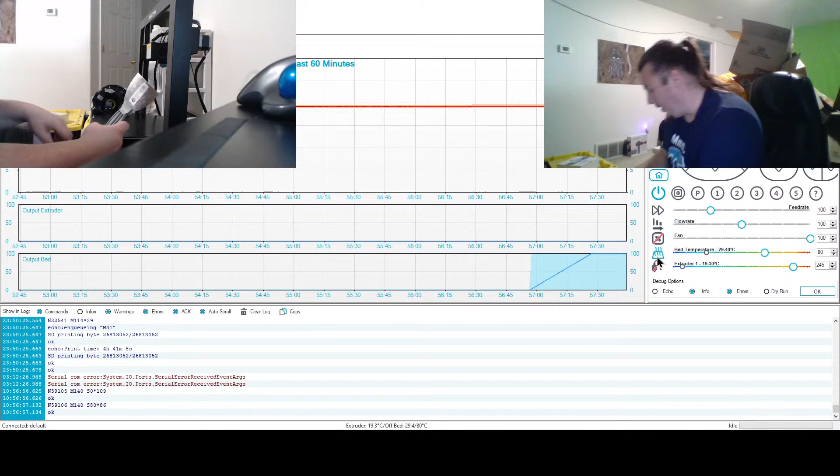Anyway, the drink dispenser is going to take a little bit of doing, but I'll tell you what I'm going to do. I'm going to kind of heat this corner up, overheat it a bit. Heat it up and it should come off a little bit easier, right? One would hope.

Because the brim is not coming off the bed easily. Using an ABS slurry to adhere it to the bed works great, by extremely adhering it to the bed.

Let's see if that's warm enough. Yeah, because I'll show you guys that ring there, that's actually a ring of material, ABS to be precise. Which I don't remember what ABS stands for.

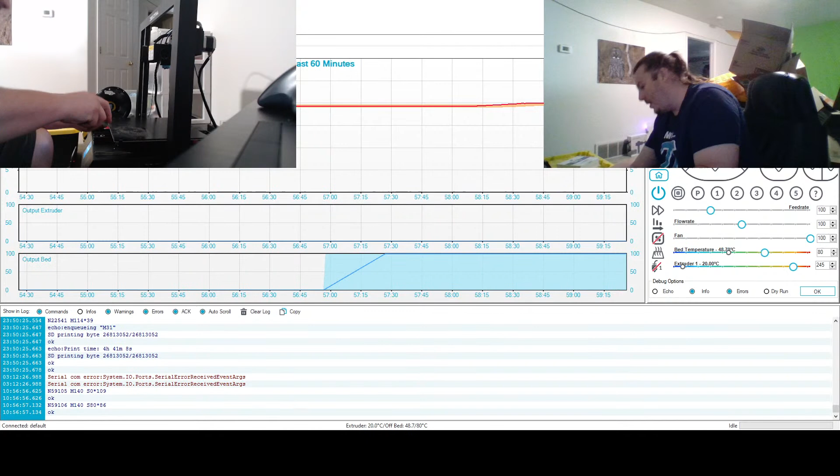What is it, acetyl-butyl styrene? Something like that? Yeah. And we kind of need him off of there so we can do other jobs.

So what I want to do is, guess while that's heating up, so I have a problem, see? I need to put stuff on an SD card.

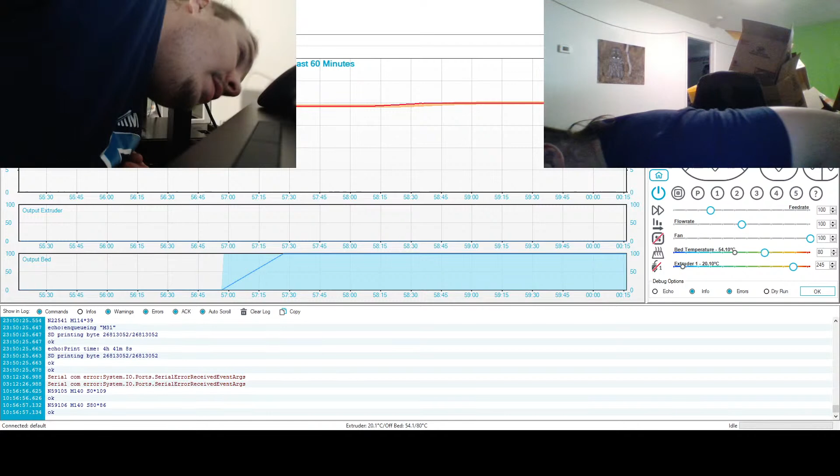Actually, not really a problem. Okay, I'll just move the mouse dingly dungly. So, boop.

Also, did anybody get the description? Come with me, and you will be in a world of pure and utter boredom. Come on, it's a thing, it's a thing that people sing. Somebody did. That we do. It's funny.

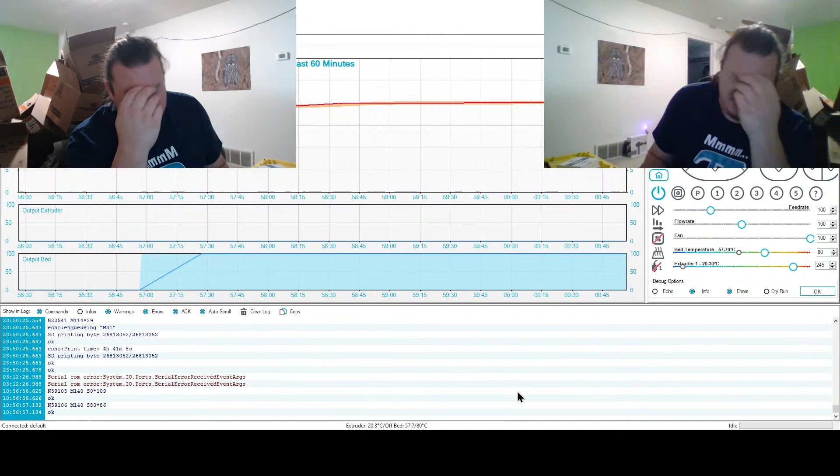I need to set up the frickin' soundboard on this laptop in OBS. That's what I needed to do today, honestly.

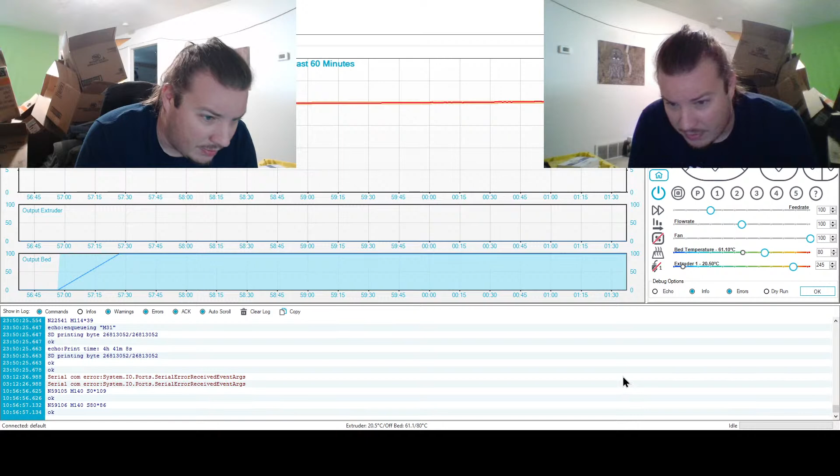I was like, what am I doing? Okay, we'll go back. I've already got the ABS loaded. Can I just print the stuff in ABS? I think I'm just gonna print it in ABS. Screw it, we've already got the ABS loaded. I don't have that much PLA left and it's kind of old, so I don't know if it'll work good or not. But we can.

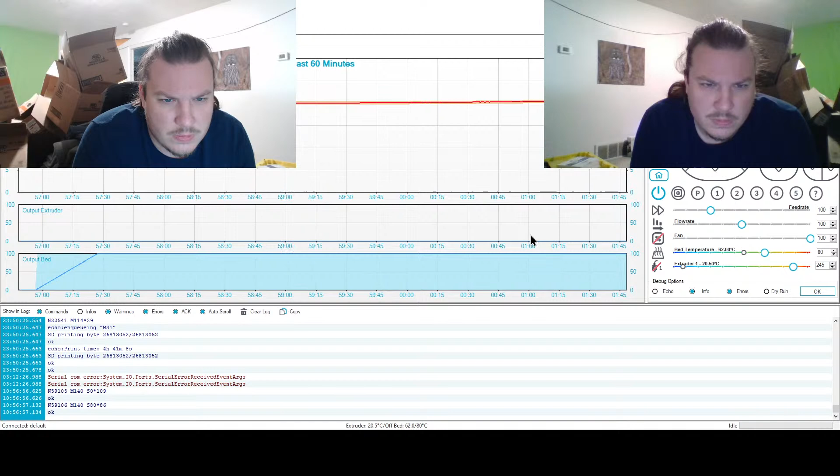Print cam mic stand. Copy. Paste cam mic stand. Bring both of those into Prusa.

Oh, it's outside the build area. Your mom's outside the build area. Okay, so... What? What? Why are you doing that? Shut up. Okay.

Lots of weird stuff. So apparently it wanted to bring it in as a single piece, so we need to do this. I want to print him exactly just like that, and then I'm going to paint supports, because I noticed Prusa likes painted supports a lot better for some reason.

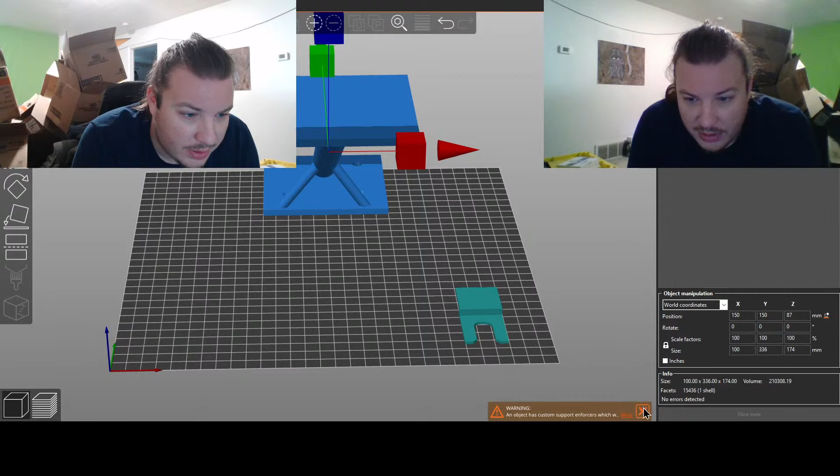Brush that. Kind of like that. Yeah. And then... Oh, that's the thing I need for the soundboard. And then... Okay, now I need this guy here. Yeah, who cares, guy? Shut up.

See, so I wonder, if you have a part overhanging another part that is part of a different part, does it matter?

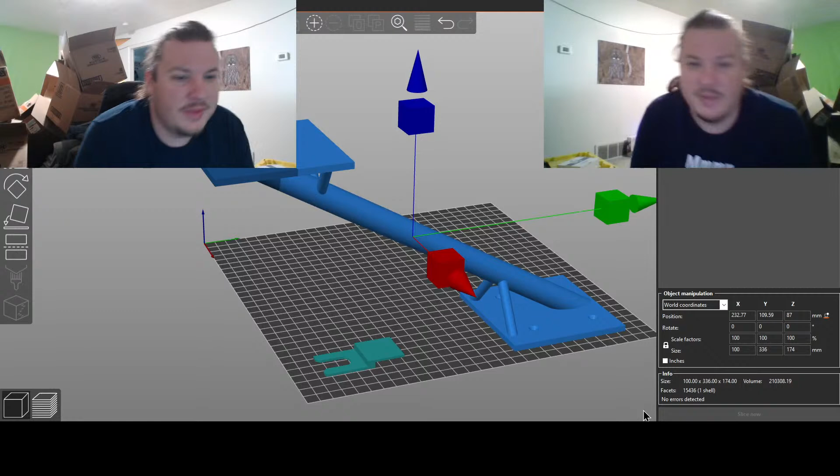Cut. Yeah, cut it exactly right there.

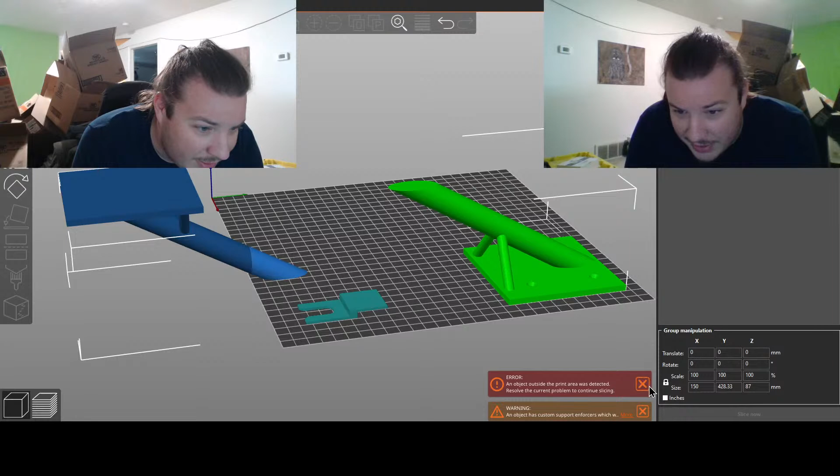What? What? What do you mean? Go away! Jesus. I want you to... Okay, fine.

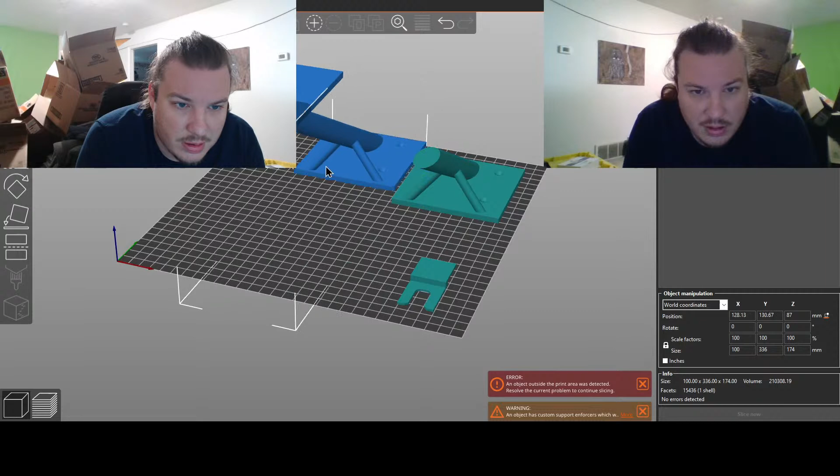Cut. We just want 2 of those anyway. No, we don't, because we don't want the screw holes. That means I have to put another one in here. Okay, we're going to cut this one, and we're going to keep only the upper part, and then we're going to rotate.

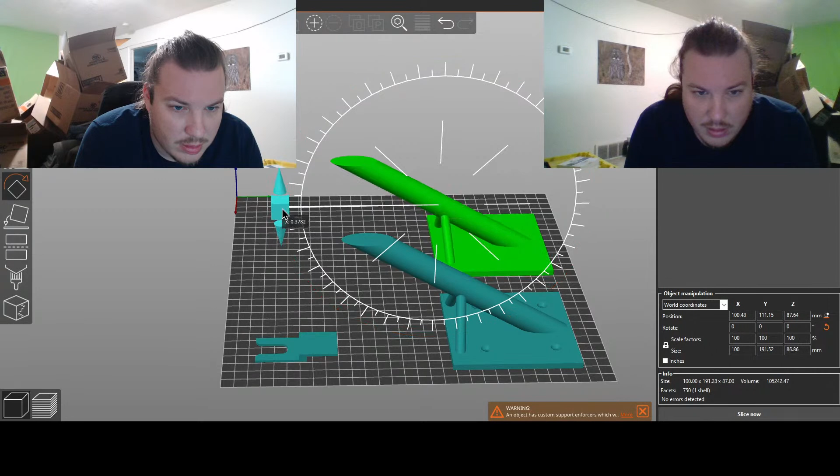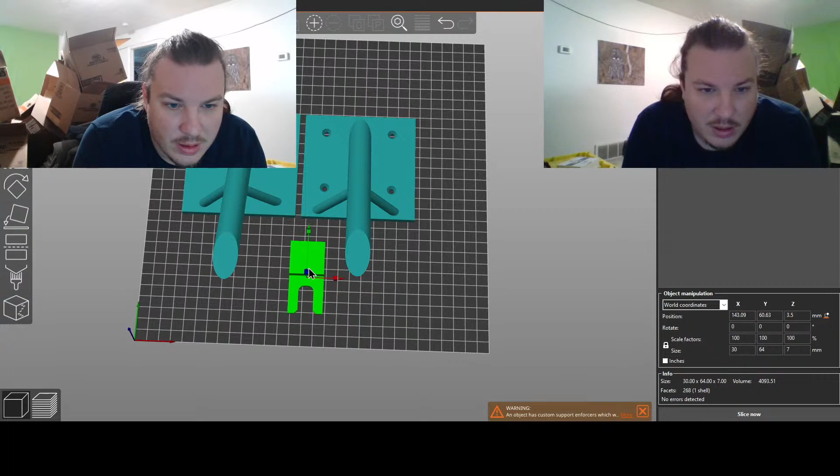Oh yeah, where's the place flat? Place flat, place flat, place flat. Okay. Now look at that, look at that. Yeah, look at that, look at that. Kind of like that. What happens if we do that?

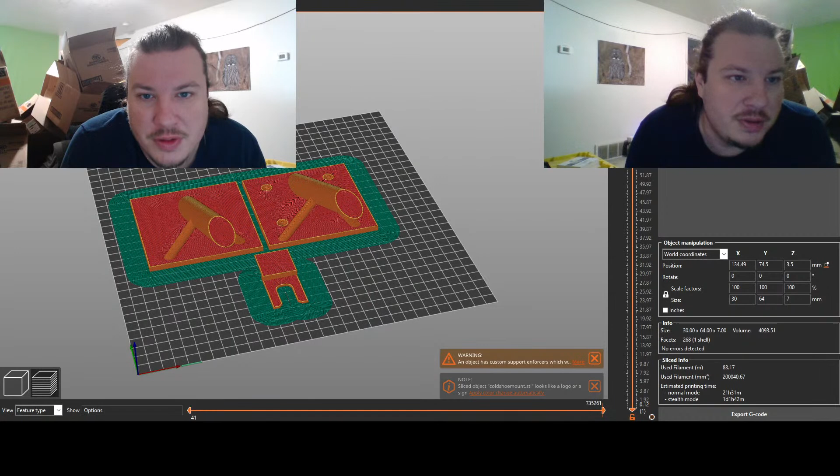Slice now. I want to try to do these angled bits without supports. What do I want to try to do? Oh, I also need to change infill to 40%. Also, give me just a moment, I will be right back.

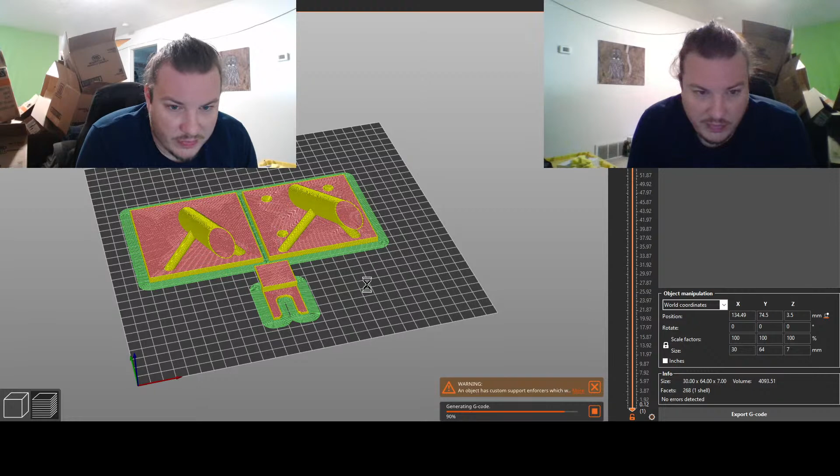Okay, so we're doing this. That's a neat pattern, concentric around multiple points. I guess it's not concentric, is it? Did I do concentric on the top? I did concentric, yeah, I did concentric on the top for this.

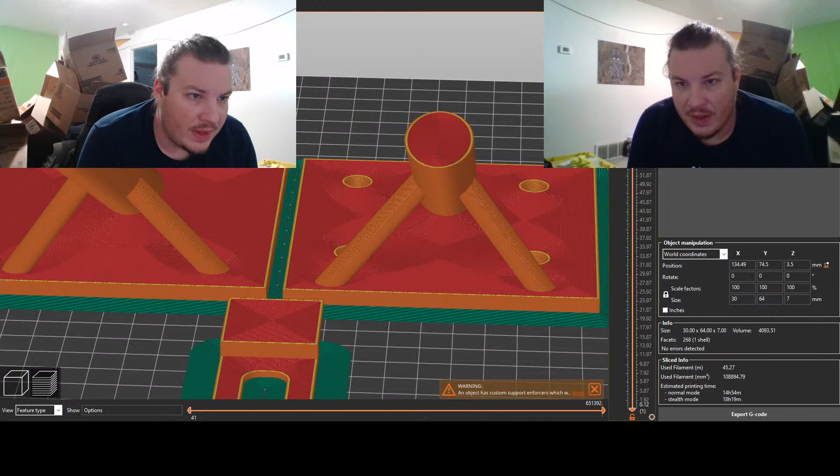So what we're gonna do, I don't know what the overhang of each of these layers is, and I don't guess we need that much infill. We could probably go with a little less. Go 25. Yeah, that much infill, that's how much we need. That's probably better, it's not like it's holding a whole lot of weight.

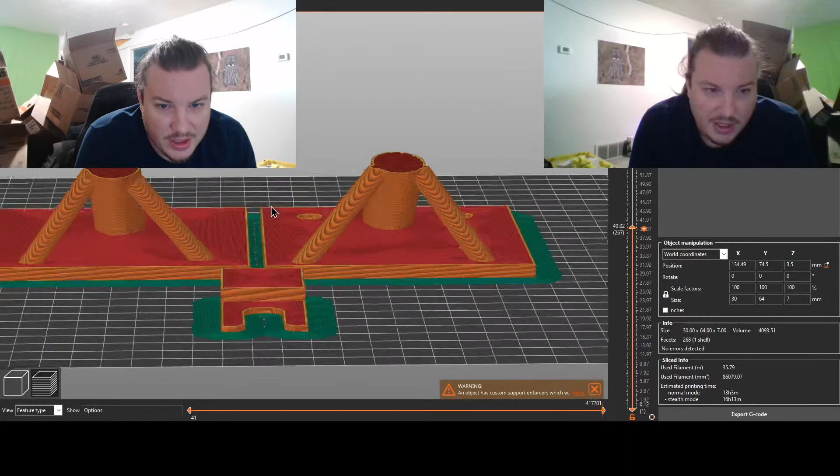Just gonna be the camera and the mic. And then, yeah, when these are done in 16 hours, you print this, I glue this surface to that surface, and that surface to that surface.

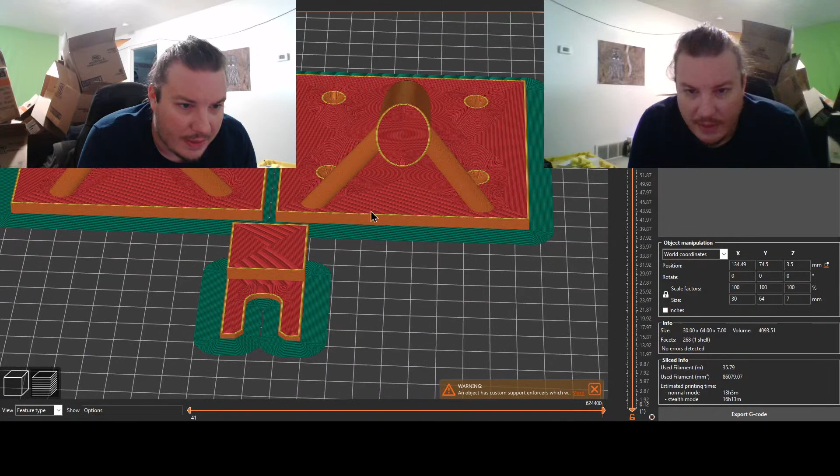I mean, the only way to find out is to give it a little old testaroo there and there. Gotta wait for the bed to cool off. It's still 56, so I gotta wait for the bed to cool off for another few minutes.

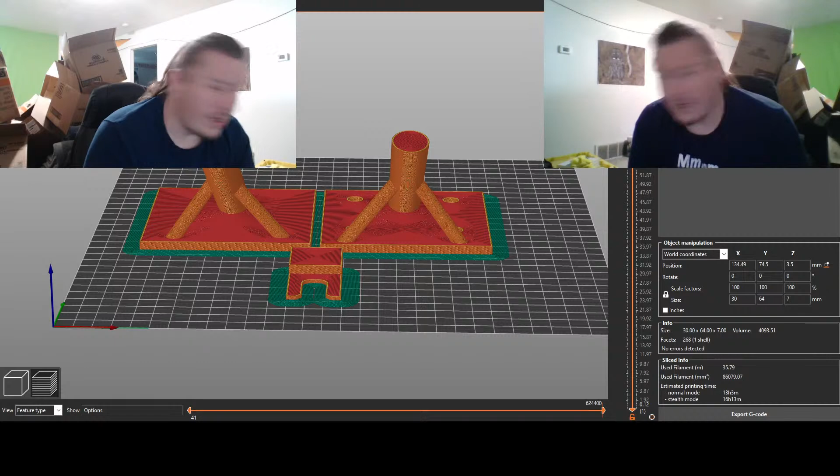And then I can take the acetone and do the thing to the thing. The thing, the thing. 57.

Guess I can start preparating. I might get the brush down to the bed.

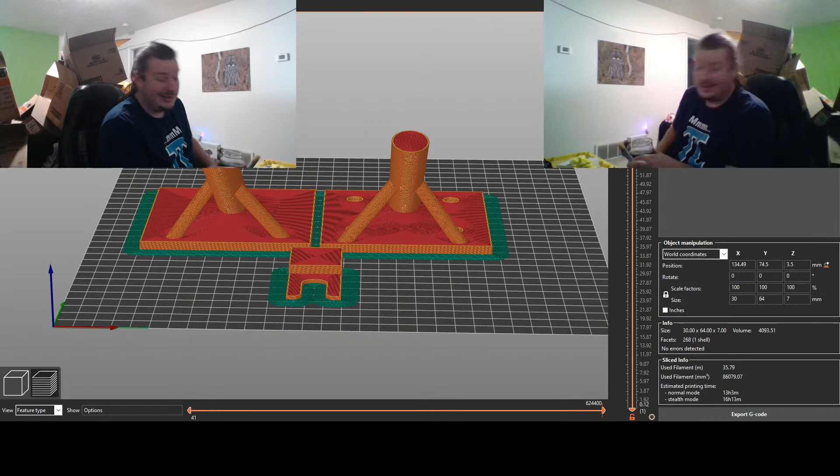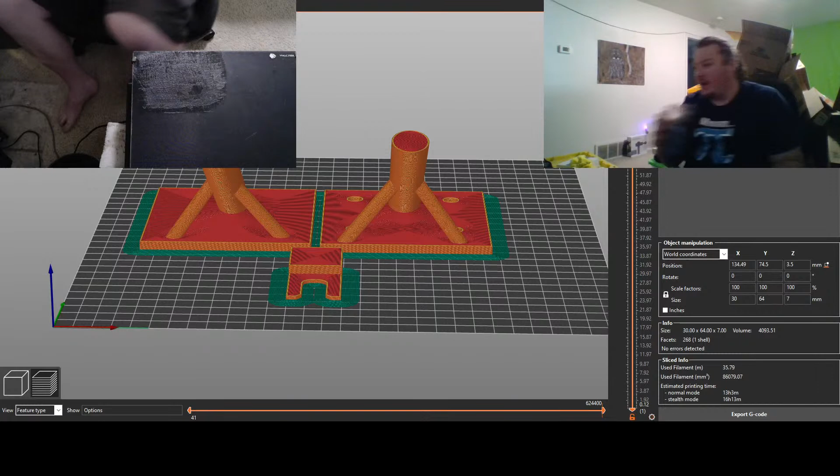So, got us a brush, some ABS dissolved in acetone.

Paint it on, nice little thin layer, all across the bed there.

Then what I need to do is I actually need to, because it doesn't go down smooth the first time, especially when the bed's still kind of warm, and it evaporates really, really quickly. Acetone evaporates very, very quickly.

So we come in here, just grab some acetone, and we can smooth some of this stuff out a little bit.

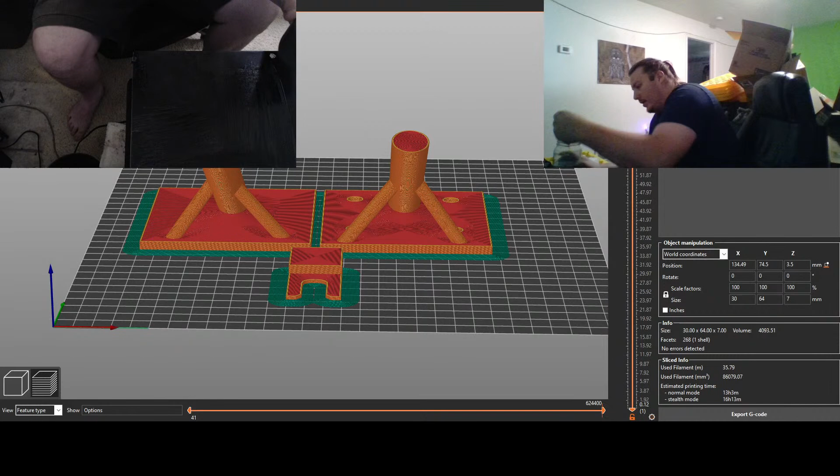I should really be wearing a respirator for this. Oops.

I then also have to reset the nozzle height, because I've just added material to the... my roommate's making a bunch of noise.

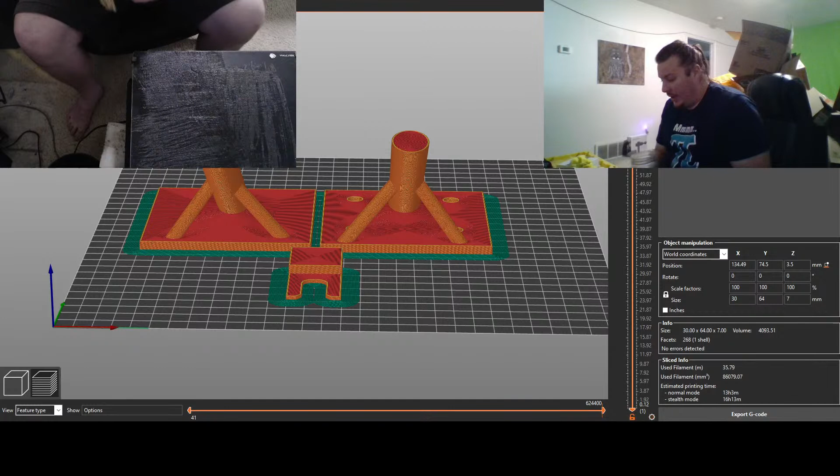Oh, but I've now added... it's drippity drippity, drippity drippity. No, drippity drippity, acetone all over half my hand.

All right, now we're going to. Boom, boom, boom, boom, boom, boom, boom, boom. Let's see, what am I doing?

Yeah, what's interesting is it didn't disconnect last night, the USB. I got the errors, let's see how many errors there are. How many errors are there? For this log, just those. Interesting.

I've got a little bit of a resonant problem, the Z-axis. Kind of annoying, actually. Alright, so what we're going to do is we're going to check.

Yep, just go down just a smooch. Here. Up just a smooch, actually. Here. Down just a smooch. Here. Fine, that's fine, that's fine.

Okay, so our nozzle is now on average, that's the key, on average, 0.15 millimeters above the bed plus the ABS layer, the lumpy ABS layer.

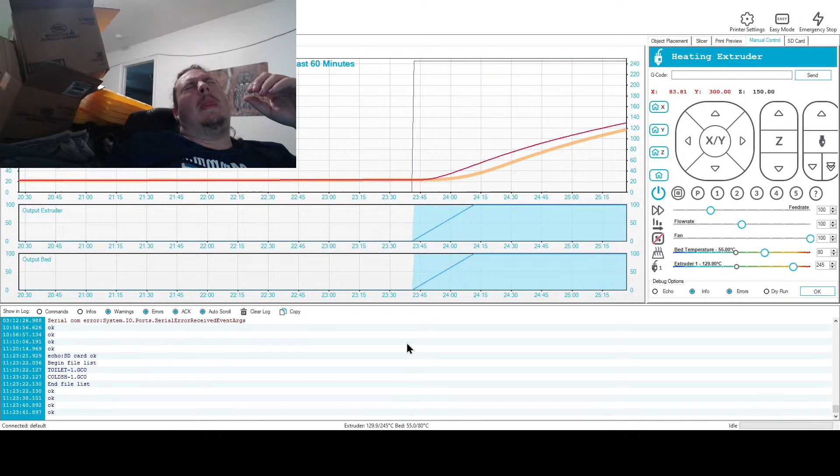I could print it out of TPU, because the cold shoe doesn't need to be super rigid, since the mic's not that heavy. So I could print it out of TPU, probably on its side.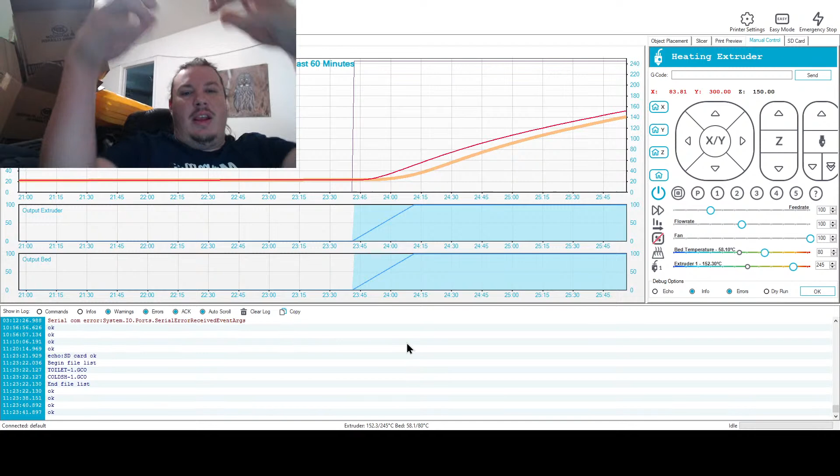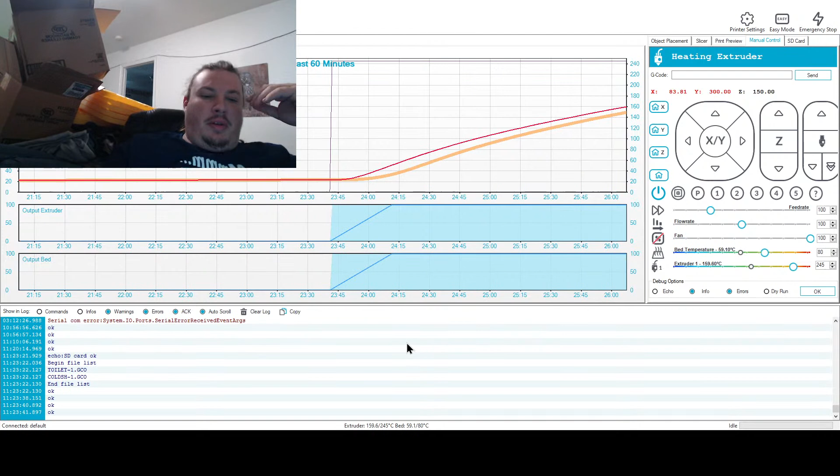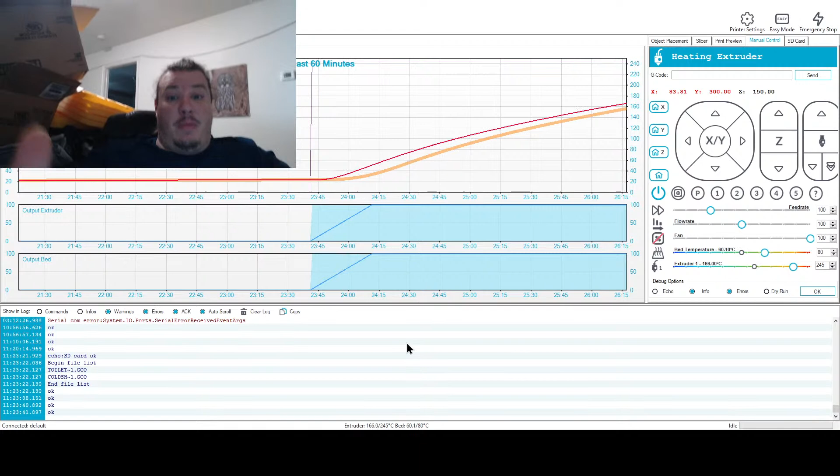I'm thinking have a little thing with fingers that stick out that'll just wrap around the edge of the laptop bezel, monitor bezel. I don't want to make it out of something super rigid, because if I hit the mic or something, I don't want it to damage the monitor. I'd rather have the mic fall off than the monitor get broken again.

Since I no longer have an OEM monitor in this thing, in my $1,200 laptop, which kind of irritates the crap out of me, honestly.

It was fine. It was fine. And my roommate decides he wants to walk by it, somewhere that he never goes. He wants to go somewhere that he didn't go. He didn't even do the thing he wanted to do when he walked by it. He walks by it, not paying attention, knocks it off the thing, and the monitor was half closed with the mouse on the keypad, and he goes to try to catch it. If he'd let it hit the floor, it probably would have been fine. But he goes to try to catch it, and he just smacks the monitor down onto the mouse.

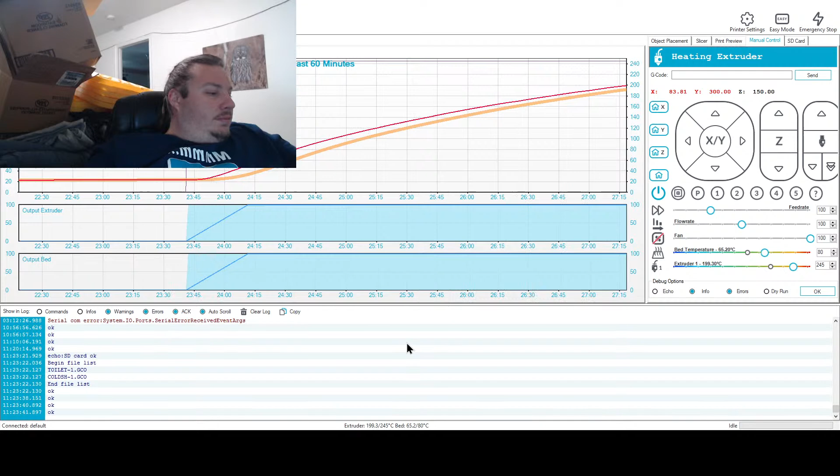Yeah. Not often is it that I worry about changing parts, but this monitor is not the OEM monitor. It looks different, it feels different, it is definitely a different part, and it irritates me.

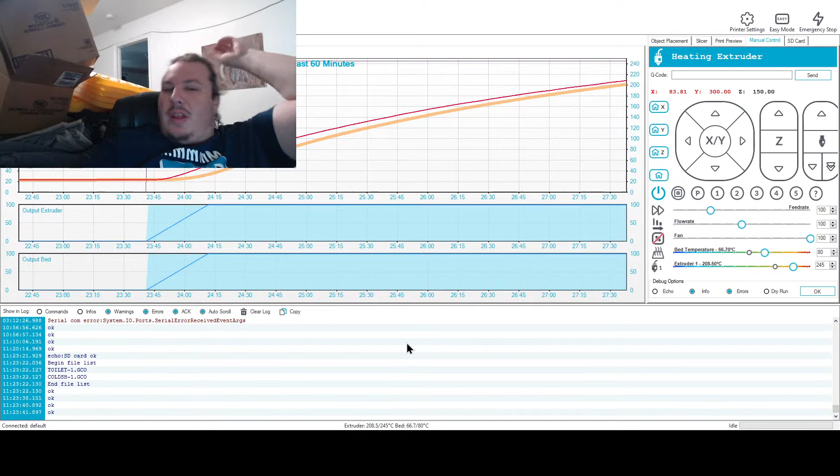So what I want to do, I have a...

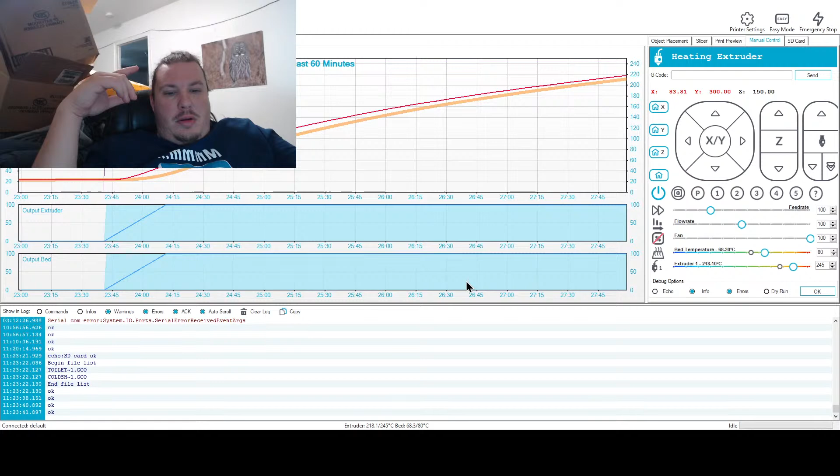I want to go to Falstad real quick. What? That's why I know that name. Huh.

Alright, so what I need to do, I need to have...

So we're going to put a ground down first. And then we're going to put the 2.5. I'm not going to worry about the resistor divider. I know how to make a resistor divider. Not going to worry about it.

What I am going to do is I'm going to put this down. And then the max we see out of that's 5 volts. And then I need, I think it's 50 milliamps. Let's account for 100 milliamps. So I need at least a 50 ohm resistor. So if I put 1K, that's 5 milliamps.

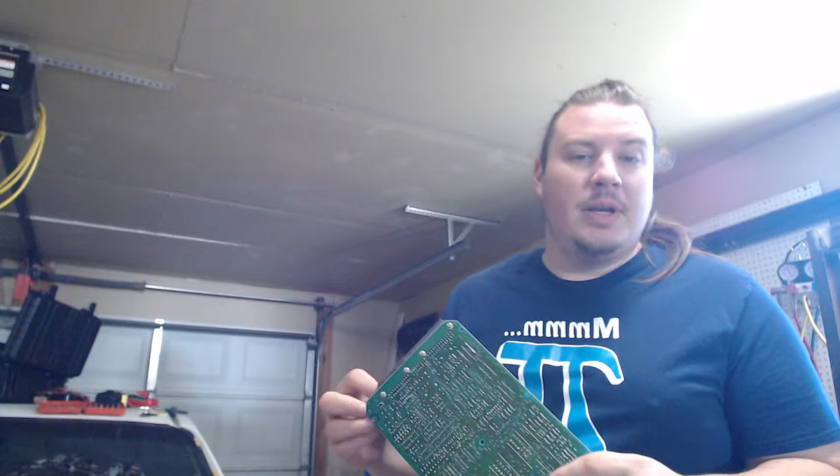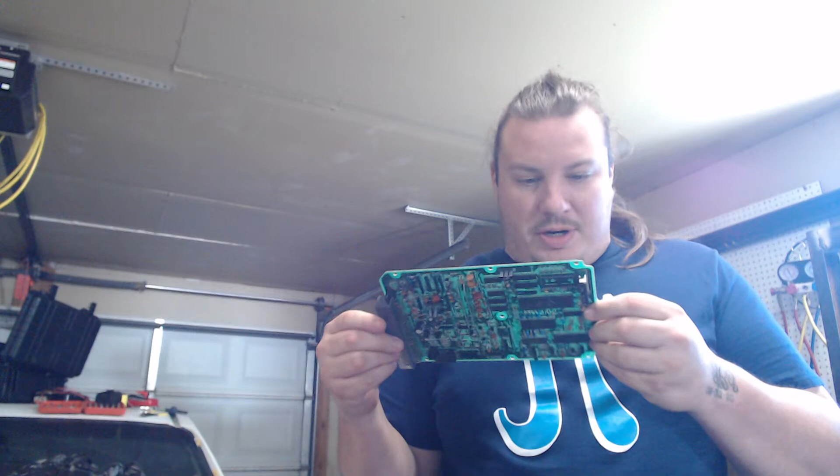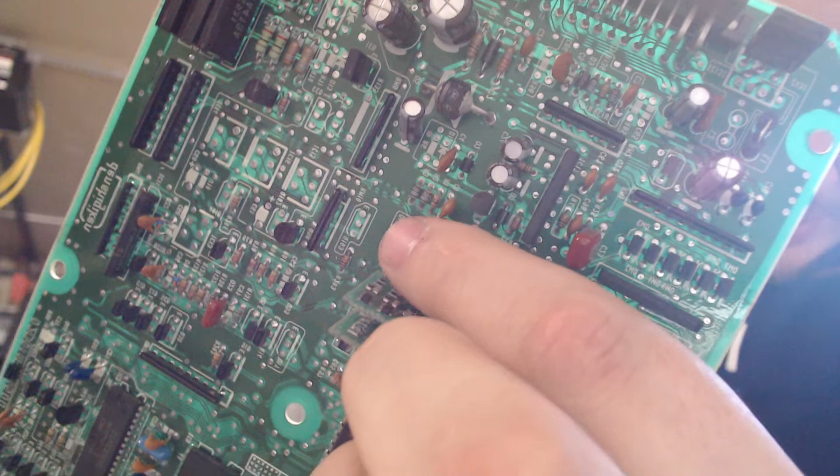The chip burning ECU, I had a feeling this was going to be the case. The ECU that I was using to do chip burning back in ye olden days, but I actually did a far better job of chipping than I did the other ECU. This one is in quite good shape, and it's still got those three resistors right there, which are the B6 input line voltage divider resistors. Okay, that's exactly what I needed to know.

So I have an OEM ECU. I'm not going to worry about putting a switch in there on the harness to make sure that I can put an OEM ECU back in it after modifying things. If I stick the OEM ECU back in with the voltage divider, the B6 input will not have any bearing on the tune, the OEM tune. So it's fine, a whole problem that I didn't even have. It's fine.

I guess what, well, I want to watch this do a couple of passes. That's what I want to do. I want to watch the printer do a couple of passes. So let's give you guys some of that too. There you go, 3D printer. And I tell you what, since I put the silent drivers in, oh boy, this thing is quiet.

It's like creepy quiet. When I first got this printer, it's kind of a cheapy printer, a $400 printer. So it's one of those guys that's one step above building it yourself, right? So this is a pre-built guy. When they shipped it, the main beam was disconnected and laid down, but everything was connected. All you had to do was pick it up, put the screws in, done. No alignment, none of that necessary.

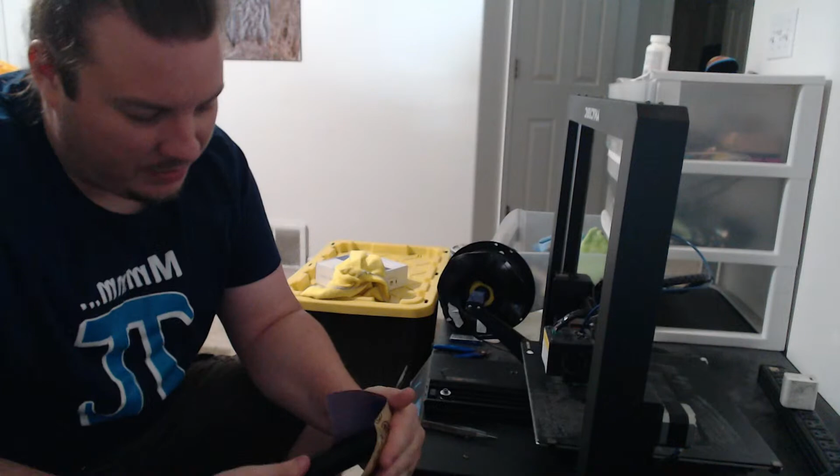Since we've had this, I'm not going to say it's been nothing but trouble, because it has given me some decent outputs, some okay outputs, but it hasn't been exactly what I've wanted it to be, kind of since we've got it, just because when you buy a thing in this type of market, okay, and we bought this years ago - I'm not talking the current state of the economy type of market, I'm talking the type of market that exists for this type of product.

So when you buy a thing that is at the bottom end of a market, there are certain expectations you have. One of those is that you're gonna have to play with it, futz with it. It's not gonna be necessarily a turnkey solution, right? When you buy near the bottom end of a market, it's almost never a turnkey solution. Sometimes you get lucky, sometimes it is.

You go on Facebook, Craigslist, whatever, you're like, hey, I'm looking for this thing, and someone's like, oh yeah, I've got one, I just upgraded, and I just want to get rid of my original for a little bit of money. Because there's a whole other thing for that too - when you're selling something, if you're just getting rid of it and try to give it away, you get wackadoos coming out. For whatever reason, the very low cost and free stuff attracts the wackadoos more than actually putting a price on what something's worth. Don't ask me why. But...

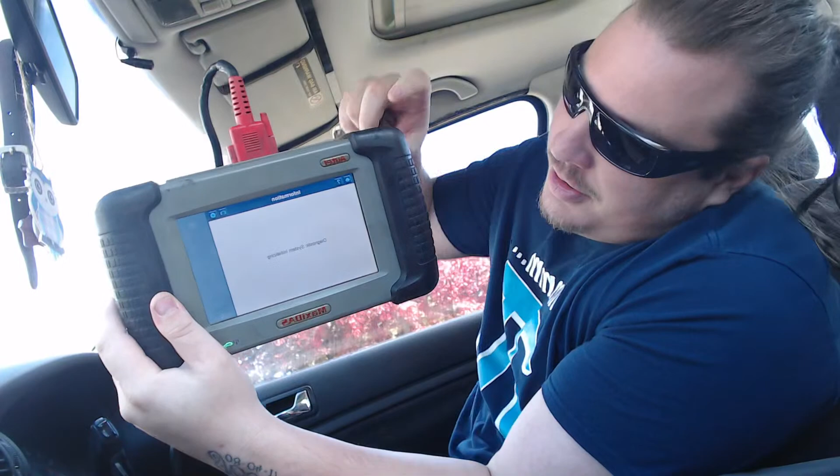So we got our handy dandy scanner here. It's got a bunch of different types of definitions. We've got a blank white screen with some words on it. Yeah, well, I got some of those.

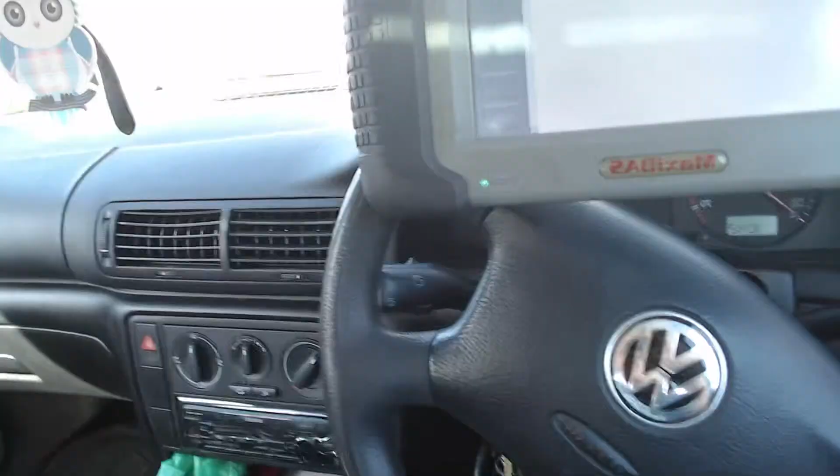Actually, I could probably move you guys somewhere. You can see, oh, tape stuck, come on. I also didn't bring the extension cord for the USB. Can we stick you like... Gotta roll the window down because it's actually hot as anything in here. Didn't we get a replacement switch for that guy?

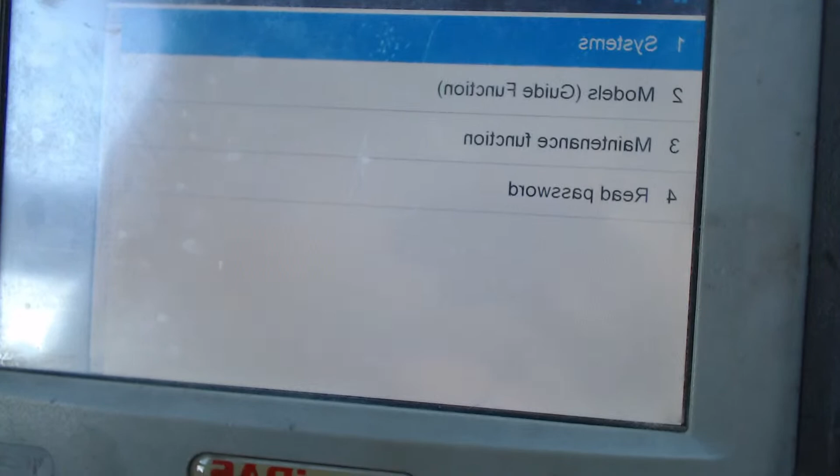Alright, so we're gonna move you somewhere where I can hold the camera more easily. Sorry for the funny business there. So now... and that's backwards, stand by. Damn it.

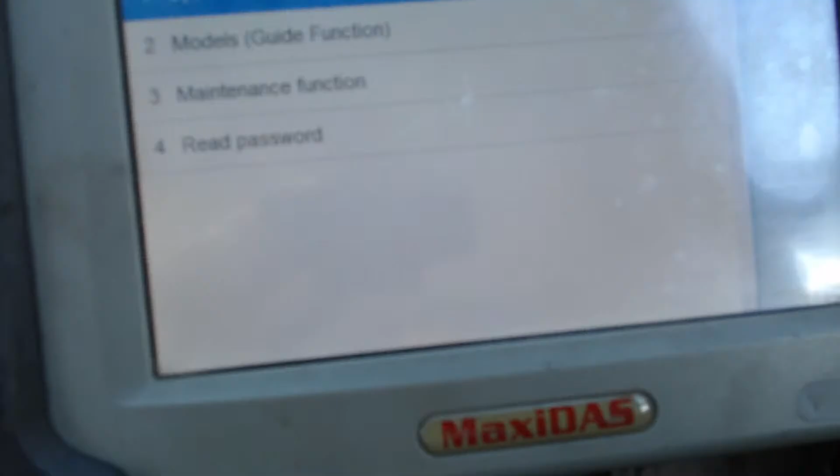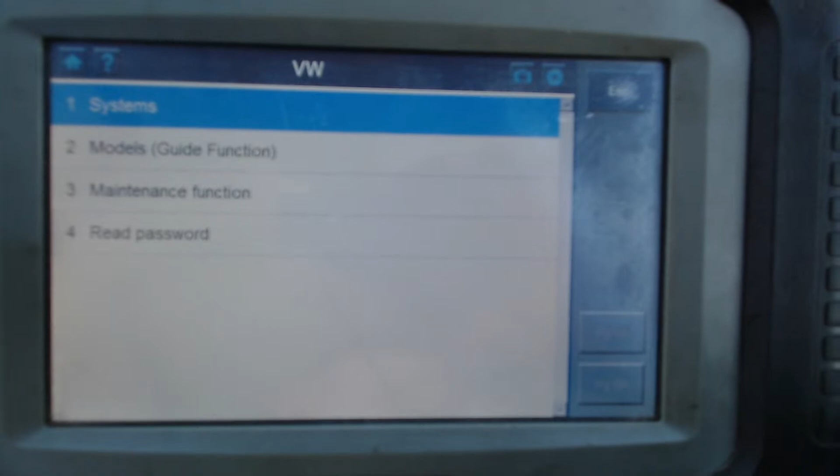There, alright. So in here we've got definitions for vehicles, OEM specific codes, up to 2014 on this guy in particular, which is you buy it and then you get like 1 or 2 years of code definitions that comes with it, and you can update it once without buying a license or something, and we did that. So pretty sure this thing goes up to 2014.

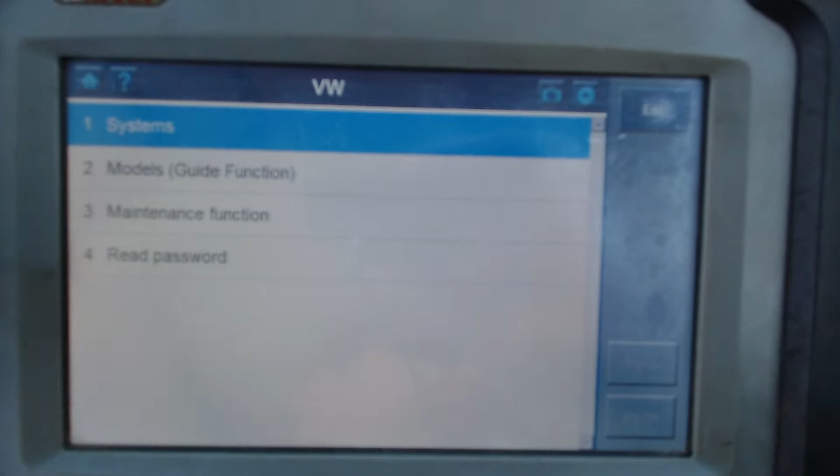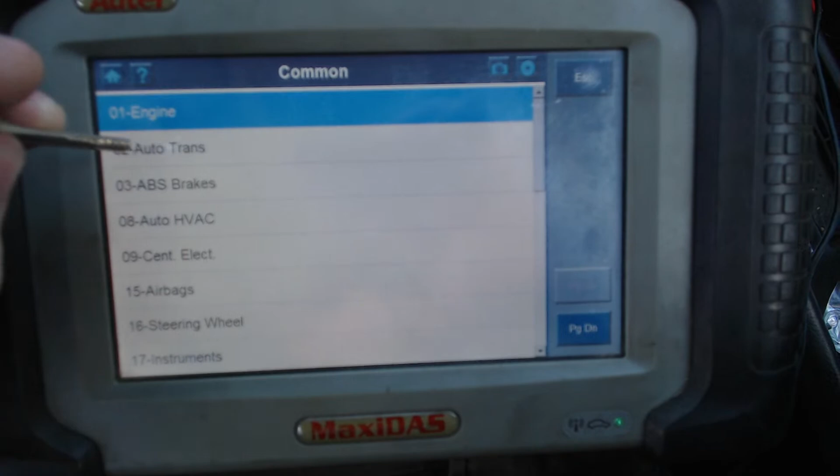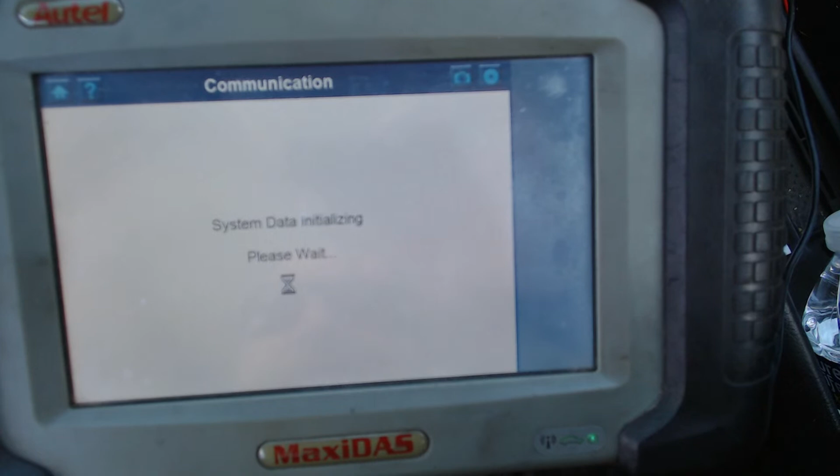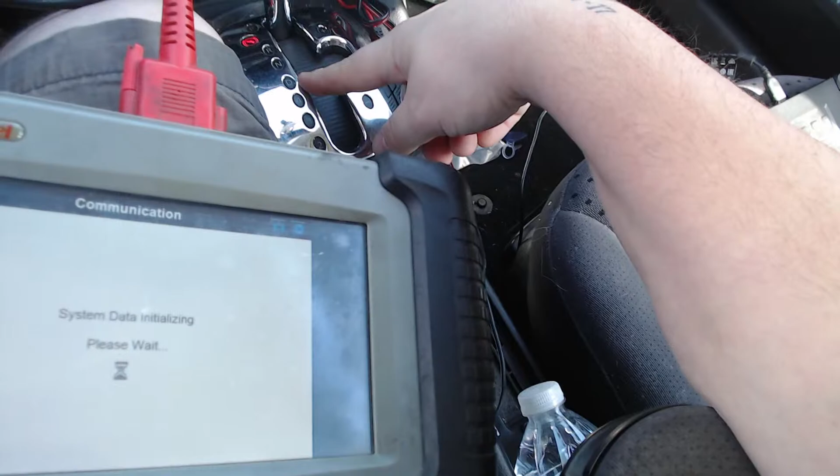But we come into VW, we got the key on. I don't know why the heck. We're going to come into systems, control unit, common, because I know it's going to be in common, auto trans. So what we've been getting is engine maximum RPM exceeded codes. We've been seeing a couple of times now, when you shift from reverse into drive, we end up getting a big spike in the engine speed being read by the transmission computer.

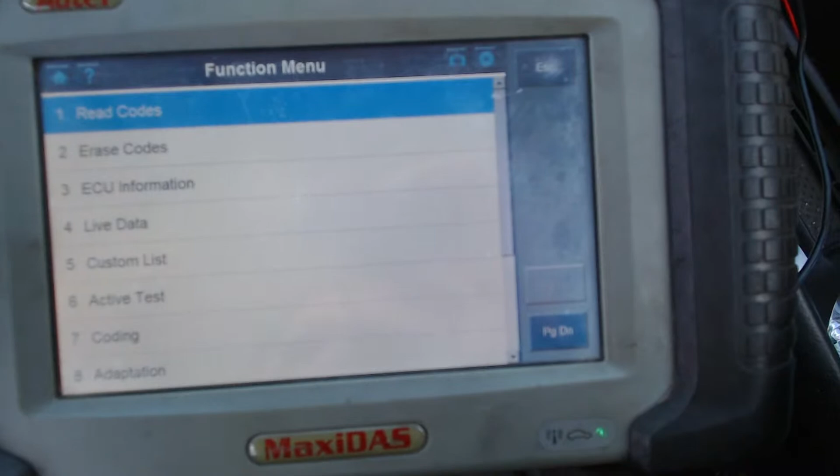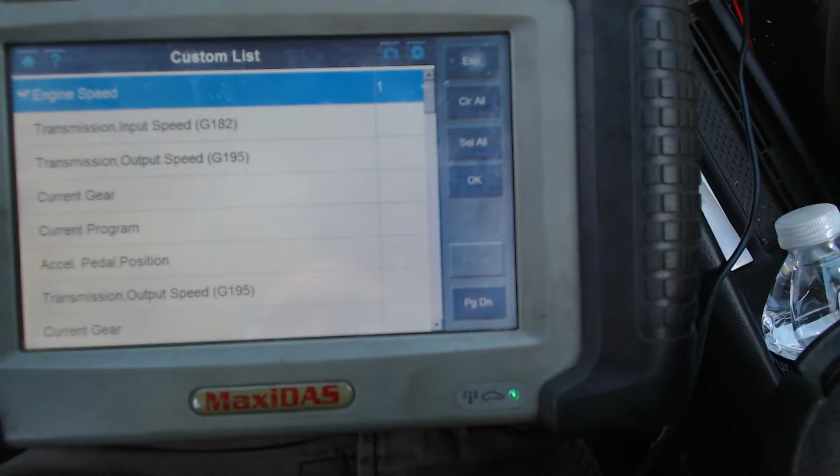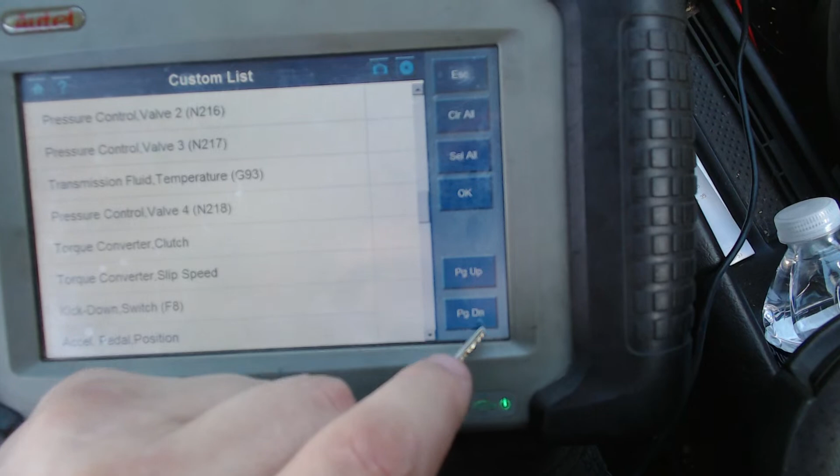So first thing we're going to do, every time, read codes, no codes, lovely jubbly. We're then going to go to custom list, because live data doesn't actually work correctly for VDubs on this MaxiDAS. So engine speed, there's a couple of engine speeds, and there's 2 different ones. So what I'm going to do now is find the other engine speeds, and we're going to add them to the list. There's like 3 or 4 of them.

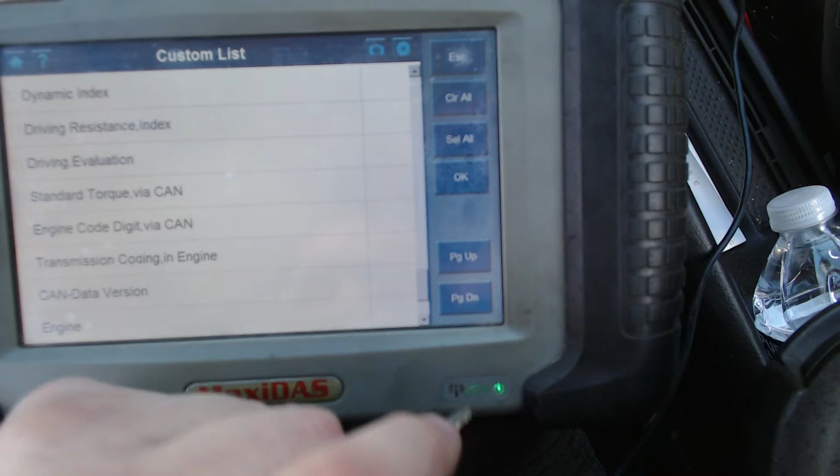3 of them. Okay. And last time I was in here, there was 1 engine speed reading that is different.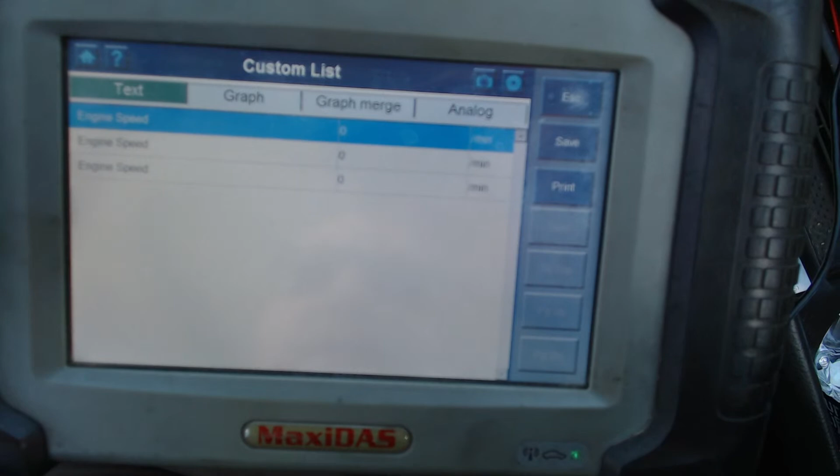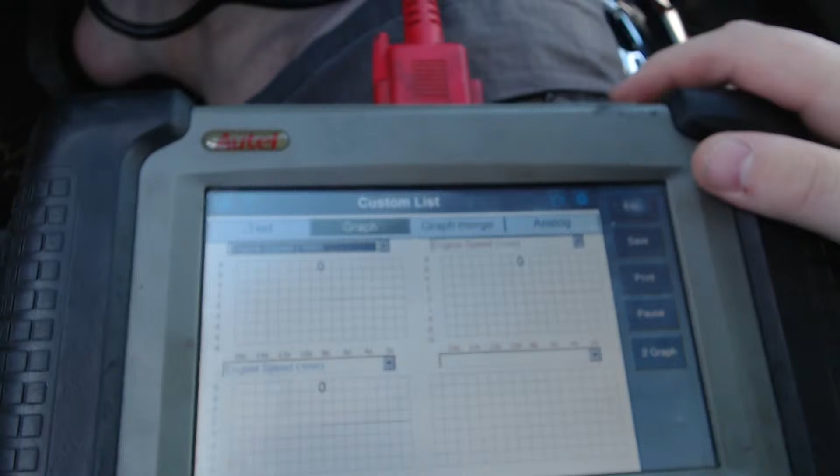So what I want to do right now is, I had this thought last night. What if it has nothing to do with actual engine speed? What if the issue is something to do with the shifter and the transmission computer? So...

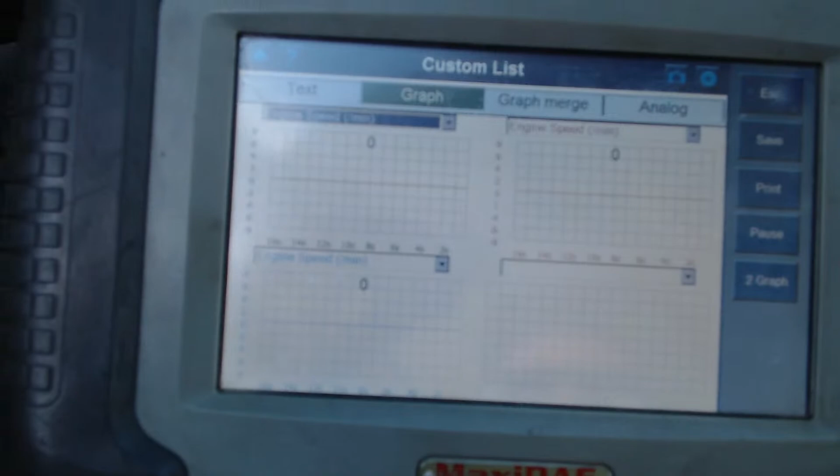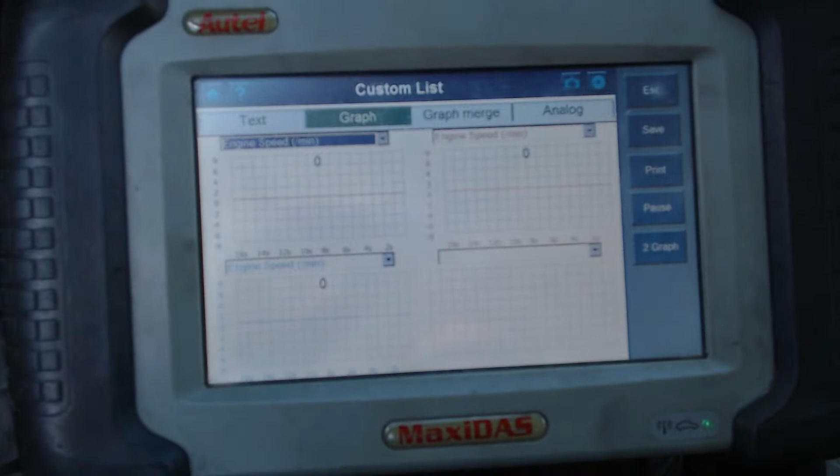Okay, I accidentally hit the power button when I did that. So what I'm going to do is shift into reverse. Make sure the parking brake's on. Shift into neutral. Drive.

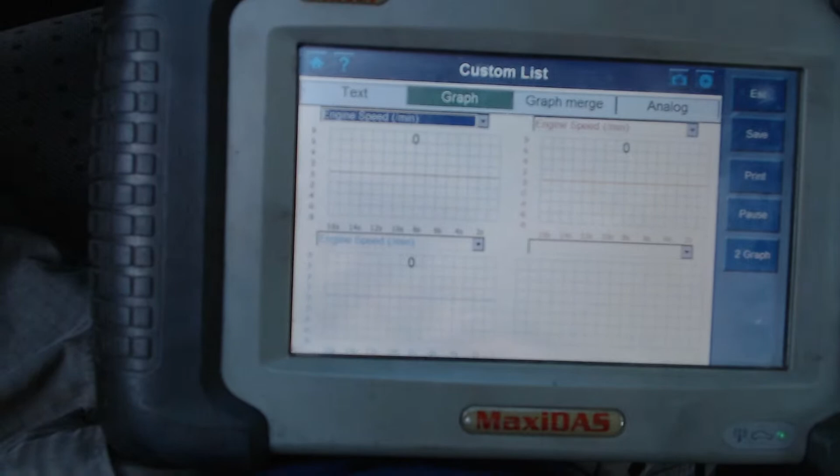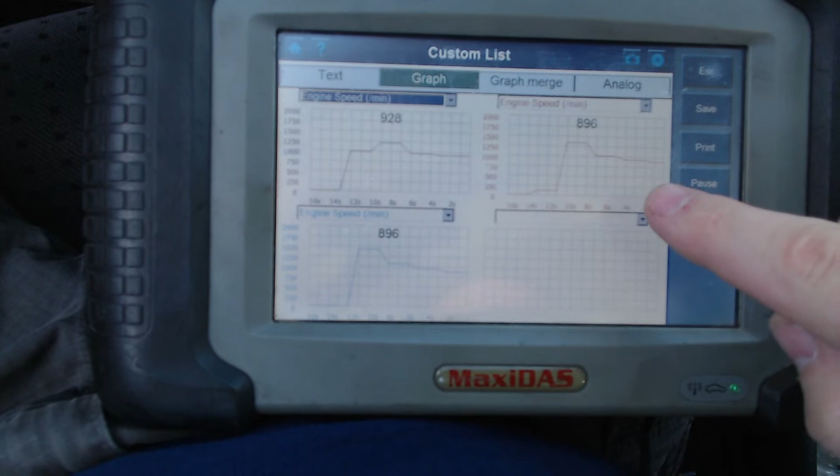Okay, so there's nothing changing there. So it's not that. That's perfect. Then what I want to do is start the engine, and I want to see... look at those. These 2 are the same. This one is different. Well, maybe it's an update rate thing. Nope, no, they're the same. Okay, so it's an update rate thing.

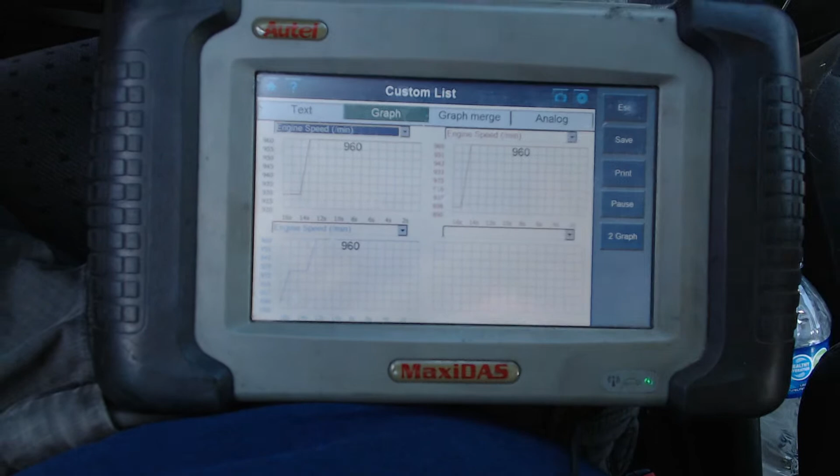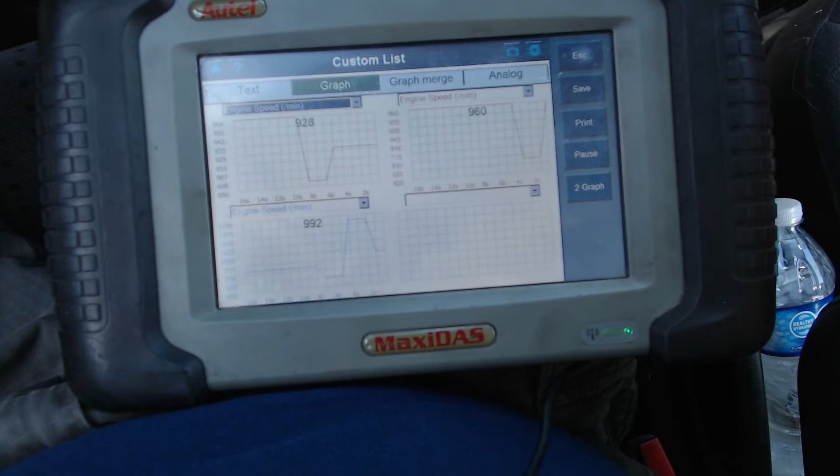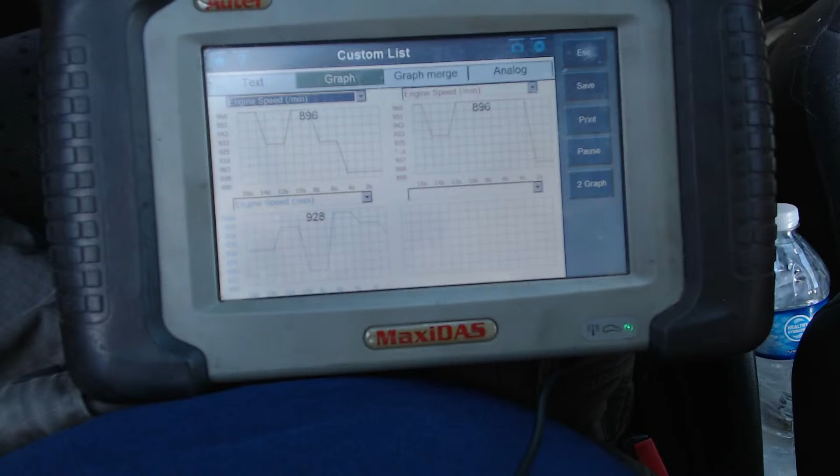But what I want to do now is see if it's straight. When you go into drive, does it do it? Well, now it's not going to do it at all. Interesting. Well, there goes that idea.

Maybe it's too warm. What I've noticed is it seems to do it on cold days, and today is not a cold day by any means. Today is actually a very nice day. So what I'm going to do real quick is, we're not in limp mode.

I'm going to drive it and see if it'll go into limp mode. No, I'm not, because doing that will disconnect the stream, actually. Because I don't think my Wi-Fi extends down to the stop sign. Okay. So we're not going to do that. It didn't do the thing anyway, so I don't think it's going to.

But it is, for sure, the transmission computer complaining about max engine RPM exceeded, causing a limp mode condition.

You know, what's going to be affected on a... If it is, oh man, I am going to laugh my rear end off. I'm going to call him. I'm going to call him. We're going to turn the brightness up on my screen. And now I'm going to call him. No.

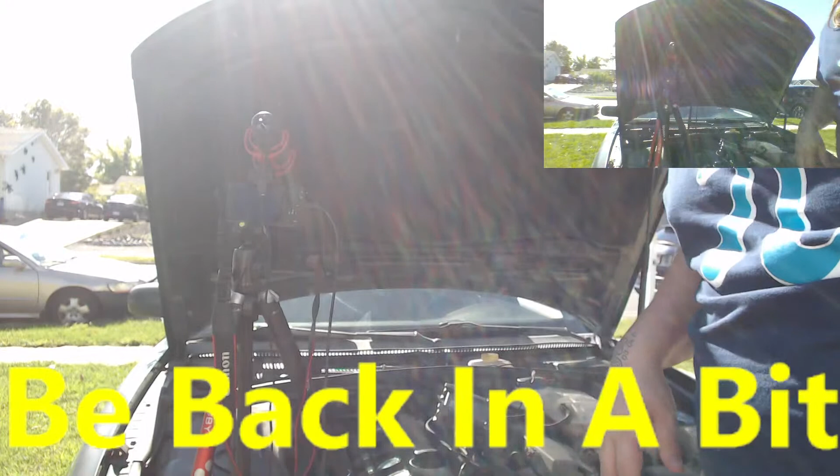No, it's on there because I'm coming and going. I'm not straight in regular in frame. I keep going and grabbing things, so I keep it up there in case anybody drops by while I'm gone. Each time I am gone, they will know that I will be back in just a moment. I am here right this second, yes, but I may or may not be in 10 seconds.

As I'm trying to get all this stuff straightened out, and I kind of like doing all of this, getting everything sorted and straightened on stream, because I think there's a lot of people, they don't really realize exactly what it is to do streaming, to do recording, to do this whole brouhaha. Like, it's not just I woke up in the morning with my iPhone and I took a video and then put it on YouTube. I mean, some people do that, obviously. But stuff that is quality, the stuff that people like to watch.

Not that. It's a big ordeal. It's a big affair. And while I'm not a big affair, currently, I will have the VODs in the history. If anybody asks, hey, what does it take to do all of this? Well, there you go. Also need cover.

I need cover. What I'll do is we'll take all these cables, pick them up, and I will put this guy. I need another cardboard box. I have a cardboard box that the ECUs is sitting on. One for the Lenovo. Give me a second.